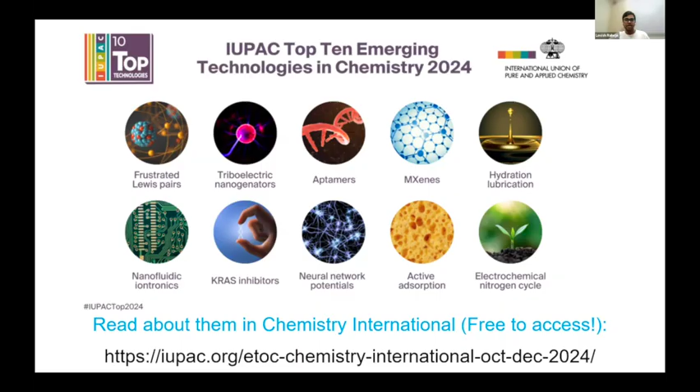Now coming to Professor Subramaniam. So since we are going to hear him, let's have a brief introduction about him. So he is a professor of chemistry at IIT Bombay. His research spans photon-phonon energy conversion, solar thermal materials, electrochemical energy storage, wearable sensors, and operando methods for probing electrified interfaces. Earlier, he has worked on carbon nanotubes during his PhD and developed nanocomposites for semiconductor application at AIST, Japan. He also founded a startup focused on solar thermal coatings.

He has received several honors, including the IUMRS Young Scientist Award in Gold Medal, the Iijima Award, Japan, and the DST-SwarnaJayanti Fellowship, and IIT Bombay's Excellence in Teaching and Impactful Research Awards. He is author of 75 plus peer-reviewed papers and 20 patents. He also served on the early career board of ACS Sustainable Chemistry and Engineering and as associate editor of the Bulletin of Materials Science. There is a lot to talk about him, but since we have limited time, I'll directly hand over to Professor Subramaniam to take it further. We welcome you, sir.

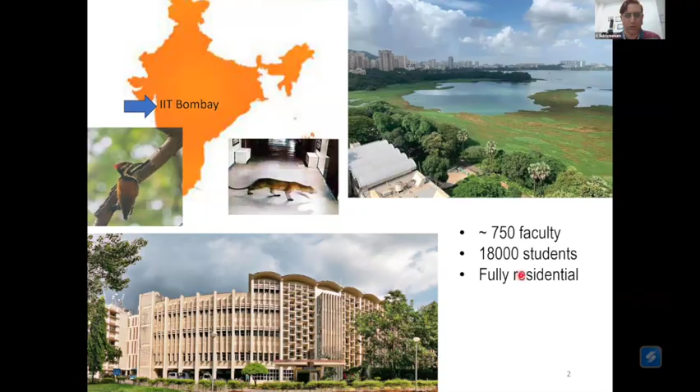So in this direction, if you look at water and ask this question: do we understand what water is apart from its chemical formula of H2O? Do we really understand water? If you ask this very critical question from a scientific perspective, the answer, I'm afraid, is no. Water has been consistently throwing a lot of surprises at us. The more we research into water, the more surprises unfold.

For example, this is a beautiful review which came out in 2006, which talks about the density or the structure of water, especially at interfaces. And you see that the density of water, which is on the y-axis, need not be 1 gram per centimeter cube, as our textbooks regularly say.

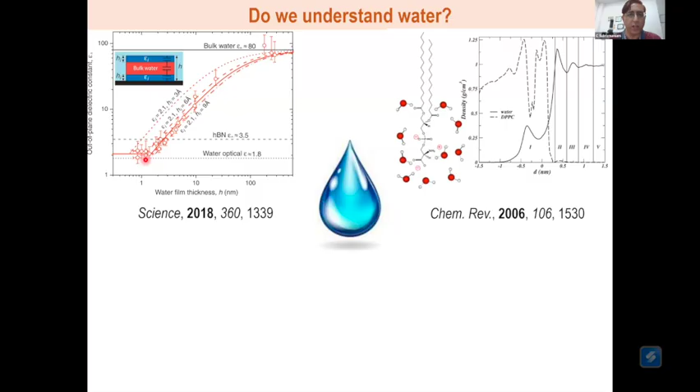And again, something in Nature which came out as recently as 2021 started looking at water as a metal, water which has a huge number of electrons being pushed into it. A very, very counterintuitive experiment where you can just write the reaction of sodium plus water giving sodium hydroxide. They did the same experiment, but then started looking at metallic states of water.

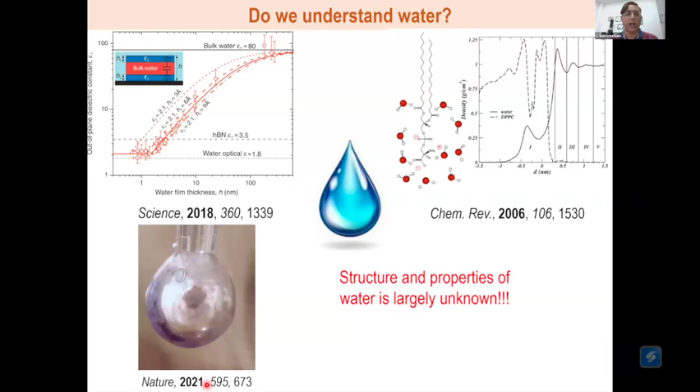So if you really go into the real interfacial properties of water, what I want to impress upon the audience is that the structure and properties are largely unknown, and a lot of surprises wait for us in this domain.

So now, with that as a background, if you look at the contaminants of water, of course, there is an innumerable number of contaminants because of all these properties. You can basically think of anything and everything, and a given set of water will have that. These are some of the few contaminants. So again, a very constricted and illustrative list.

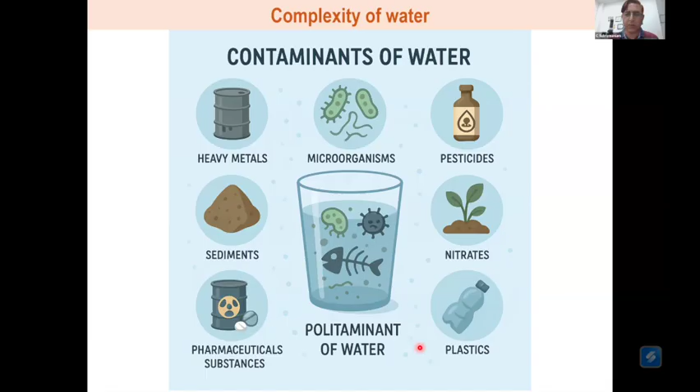But what really is coming out from this is, if you want to purify water or clean water, the problem is so very complex that it cannot be done by chemists or physicists or biologists alone. In fact, what we want is science as a whole and technology as a whole to come together to get this pure water. And that is what we are trying to lean towards in the rest of my talk.

So, a little more about water: the total volume of water on Earth is about 10 power 21 liters. This is fixed. So every single water molecule that you find on Earth is coming out from this 10 power 21 liters. And the freshwater availability out of this is extremely low, about 4%. So we need to really think of pure ways of purifying water.

And how does nature deal with this? Nature has its own beautiful hydrological cycle, or the water cycle, which is basically an evaporation process followed by condensation and precipitation, which kind of recharges. And this is how the water cycle or the hydrological cycle evolves.

But here, the interesting aspect is evaporation is an energy demanding process. That means if you want to take liquid water and make water vapor out of it, you need to supply energy, which is roughly about 2250 joules per gram of water.

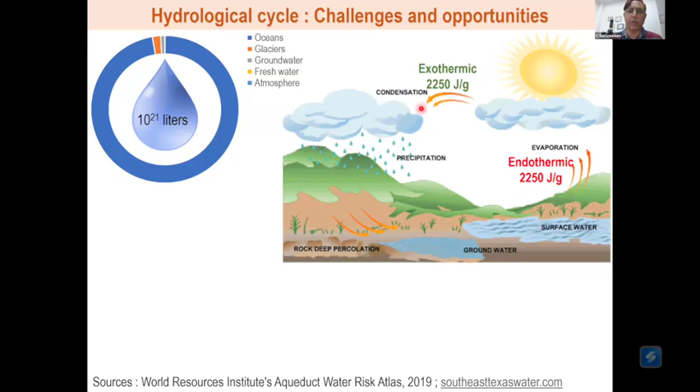And the same energy that is supplied to the water body during its endothermic evaporation is actually released back when it is forming clouds and precipitating down as continuous rain. And this is how the energy balance along with the mass balance is treated in nature.

But if you look at the Earth as a huge living lab, and try to see the rate at which water forms clouds and reprecipitates as rain, it's about 1 liter for every meter square area of the Earth in 1 hour. That's the amount of water that is evaporated and then falling down at some point of Earth at any given time. So somewhere on Earth there is rain at any given point of time, and this is basically the rate at which the water evaporates and falls down.

And the important thing about this entire beautiful hydrological cycle, which has been operating for as long as the Earth, is that the evaporation of water leads to water vapor in its purest form.

This leads to water vapor generation, which is the purest form of water. Irrespective of the source of water, even the dirtiest form of water you can think of, once water evaporates as water vapor by absorbing that 2250 joules per gram, this is the purest form of water.

Therefore, the only limitation to this entire naturally happening, ubiquitous hydrological cycle is that the kinetics is extremely slow. Nobody wants to wait for 1 hour to get 1 liter of water, or in the course of a day, 24 hours when the sun shines, you probably end up with 5 to 7 liters of water, and that's too small for the kind of population the Earth has right now. So the kinetics of the hydrological cycle is really slow and climate dependent. So these are things which we want to take up as a material science challenge.

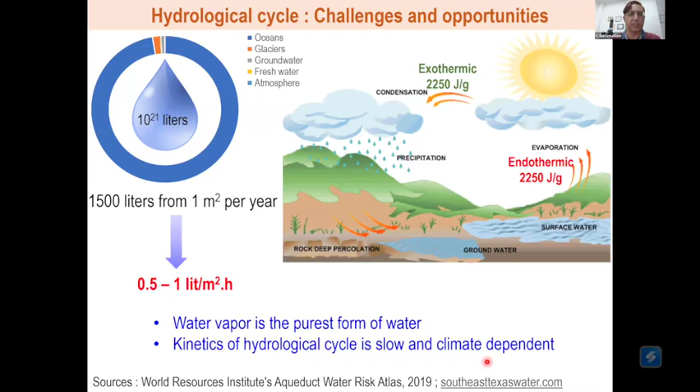We've kind of mimicked the natural hydrological cycle in these devices which are called solar stills, where you take dirty water and use purely solar energy. The heat from the sun evaporates the water, it condenses back on the backside of this glass surface, and then you can collect the condensate water, which is of almost similar purity to deionized water, because it's going to contain extremely low ionic salts or any other kind of impurities. This has been with us for almost 6 to 7 decades.

But the problem is, if you look at it from a wholesome picture, the light admitting surface, which is the glass surface on the top, is exactly the same surface on which the water vapor condenses. Sunlight penetrates the top surface and ends up heating the water. Once the water evaporates and forms water vapor, condensation starts to happen on the same surface. This means it is a self-limiting process, because once you start forming water drops, you attenuate the light intensity going down, and therefore the heating and water vapor production naturally decrease. So this is a kind of vicious cycle, a self-limiting process.

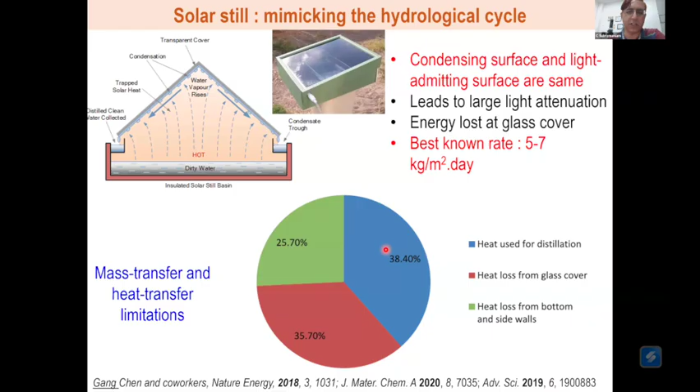These devices won't do any better than nature, which is about 5 to 7 kilograms per meter square per day, about 5 to 7 liters of pure water as condensate. And like I told you, condensation is an exothermic process. It releases heat, which adds to the efficiency loss. In fact, if you do an energy balance, the heat used for distillation, which is water vapor evaporation and condensation, is just about 38 or 40% of the total energy available from the sun. So this is really the crux of the problem: greater energy efficiency is required to bring about higher throughputs of clean water from solar stills.

So this is the problem that we started with, and said, okay, what do we do? If you look at the solar spectrum, it starts from 250 nanometers and goes all the way up to 2500 nanometers. This is the entire spectrum of light that the sun throws at Earth. Solar panels or any kind of photo-driven process try to utilize part of the ultraviolet region and a large part of the visible region. They actually have preventive mechanisms in place to avoid the infrared radiation, which contributes heat, especially in a country like India. You step out in the sun, it's extremely hot. So infrared radiation is never a part of these technologies, which was very surprising to us.

And we said, can we capture and utilize the entire range of the solar spectrum instead of being partial to the ultraviolet and visible part? Can we include the infrared radiation and utilize that as well, because this part of the radiation contains 50% of the solar energy. So by restricting ourselves to the ultraviolet and visible region, we are only working at 50% efficiency straight away by neglecting the infrared component. So for that, we needed materials. So what is the material?

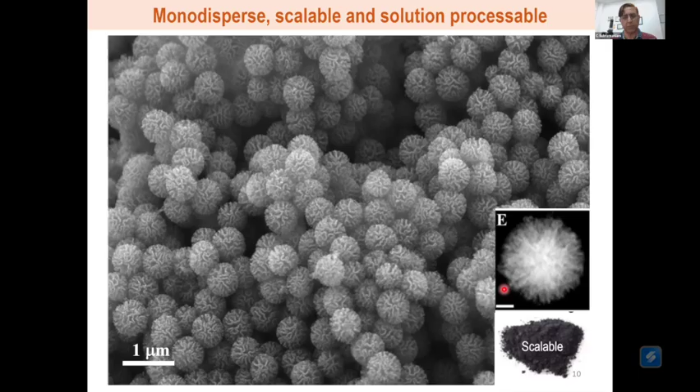So what do we do with this? When we make it, we get it in the form of a solid powder, which we then process into a dispersion or a paint. This gives us the versatility to coat it on a lot of different substrates. For example, you can coat it on the wall of a building like a terracotta or a cement structure. You can coat it on metals like copper and aluminum. You can even coat it on filter paper.

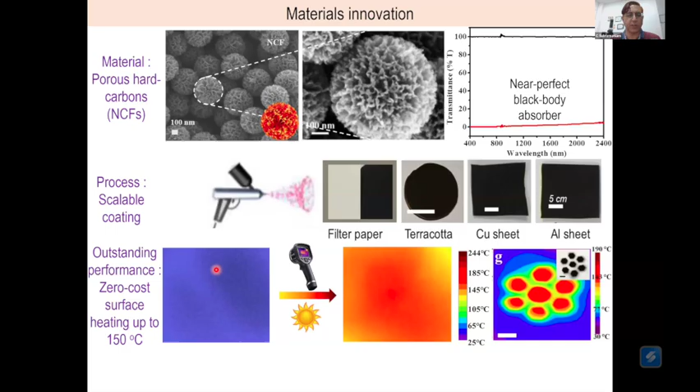The next question is, what happens to this energy? Because when it absorbs photons, it absorbs the energy from the light photons. So for that, we looked at thermometric imaging to measure the surface temperature. For example, this is the surface put in the dark. The minute we put it in sunlight, you see that the surface temperature shoots up, as shown in this red image, and it reaches almost up to 150 degrees.

This is just clean green heat that we are generating on the surface just by putting the coating in sunlight. The material absorbs the sunlight and converts it to heat. So there is this photon to phonon conversion, and the phonon gets manifested as heat energy at the surface of this coating.

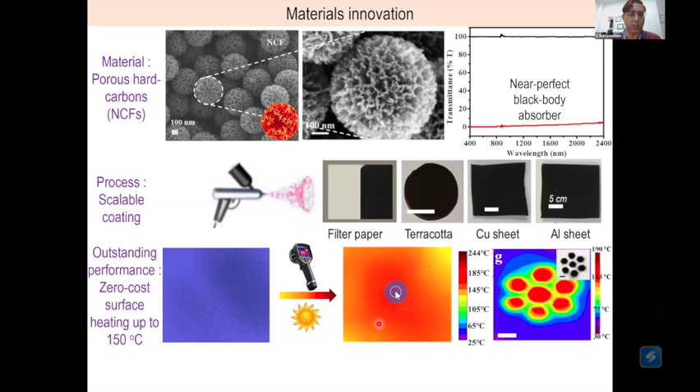And again, we wanted to understand a little bit about why the temperature that we are reaching is significantly higher than other materials. So we wanted to understand that. So we have done a variety of fundamental characterizations. Say, for example, this is the SEM cross section of this material.

So imagine these are three-dimensional spheres, nanospheres, and you break them open like you crack the sphere, and that allows you to see what is inside the sphere. And this cross section actually resembles very closely a Japanese kind of origami fan, which basically has a broad mouth or opening on the surface, and that is continuous and extends all the way to the center of this material in the form of a continuously graded pore structure.

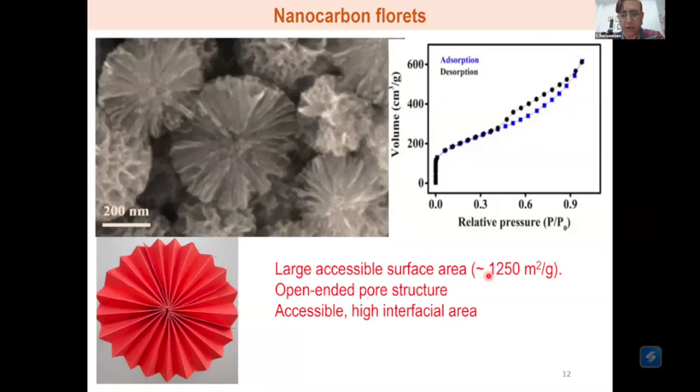So if you can kind of imagine the structure, you take a cone and then assemble this cone one against each other in a 360-degree fashion, you get this entire structure, the three-dimensional structure, isotropic structure. And that is manifested as a very high surface area of this material, about 1,200 meters square, but more importantly, this is what helps in its large absorption.

And now if you try to put a photon in any direction inside a cone, it is only going to get internally consumed, through something like a multiple internal reflection channel. It is going to get internally reflected and consumed and not come out. That means hardly any dissipation happens. The photon energy is completely thermalized and internally consumed by this material.

And that is what gives us an alpha, which is the absorptivity, very close to 1, whereas the emissivity, because of this cavity geometry, is around 0.3 to 0.4, which is actually violating Kirchhoff's law of thermal radiation. And you know that these kinds of violations are very well known in literature, because cavities are one of the best absorbers and one of the poor emitters.

But when it comes to applications, this low emissivity is actually important, because low emissivity at a larger, macroscopic scale means that the radiative loss from this material is low. When something heats up, it always radiates and gives out its energy. This is coming all the way from Planck's law of thermal radiation.

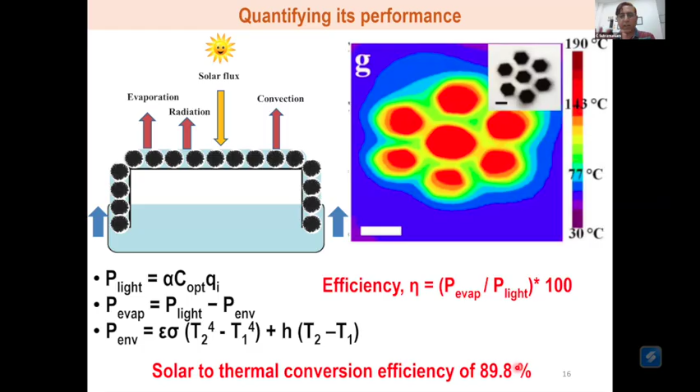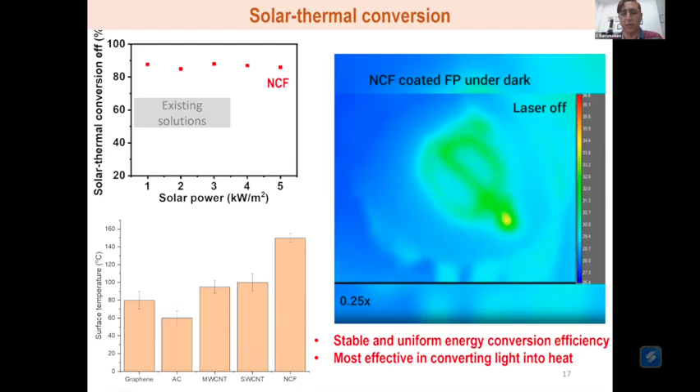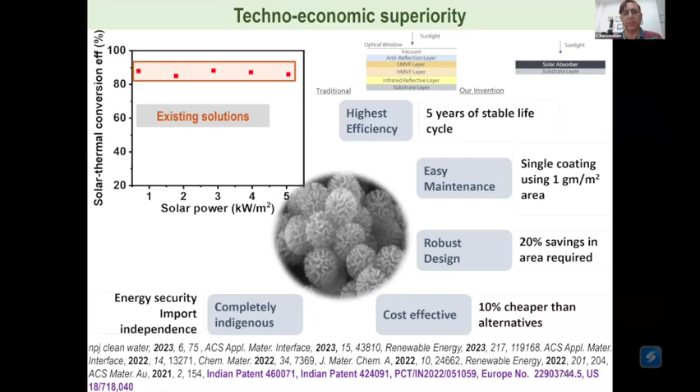We have done a lot of other tests. I'm not going into the details of this, but because it's a carbon material, it is going to give you a lot of stability of function. And especially when you look at solar to thermal energy conversion, this is going to be one of the best materials. So now, with that as the background, in the last probably 5-10 minutes I'll try to impress upon you the applications, the products and technologies that we have been able to develop. That was the science part of it.

Now, when you look at carbon dioxide emission, I know this is an important aspect of sustainability, global warming, and everybody is now bothered about the concentration of CO2 in the atmosphere. But a very interesting and shocking statistic that we came across was 45% of the global CO2 emissions actually comes from heating air and water. These are just two ubiquitous things that are everywhere around us. You start heating them, you emit carbon dioxide in the process, because most of the heating sources that we have are non-renewable sources, which means that you end up putting out CO2 at the same time that you're generating heat. This is accounting for 36 gigatons of CO2 emissions from heating alone.

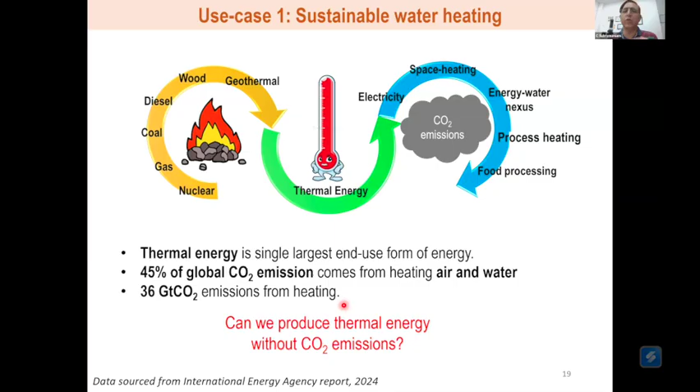So now we thought that in this context, the heating that we are generating purely by solar thermal using our NCF material is something which is going to be extremely useful and relevant, because it comes with zero CO2 emissions. There is no CO2 emission, but at the same time, you produce heat on the surface. And now any heat on the surface becomes an engineering problem: how do you take that heat and put it to use, or put it to do a job for you?

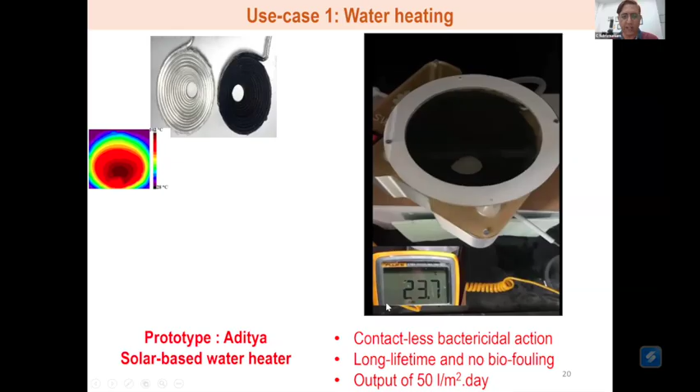And so the first example that we did was take these hollow aluminum tubes, bend them around in a spiral fashion, and coat the outside of this. The idea is that these are hollow aluminum tubes, so you can flow water through the inside of these tubes, put this in sunlight, and this heat generated by the coating is now able to transfer through aluminum, because aluminum is a good thermal conductor, and we should be able to heat water through that. And that is exactly what this video shows you.

And now we developed a prototype. If you see, we are measuring the temperature of water at the outlet, and you can see that the temperature reaches close to 80 degrees. In fact, we are able to cross 80 degrees. This is water heating with no other energy but sunlight.

And because we are able to cross 80, something interesting opened up: a device like this, which is hardly 1 foot by 1 foot and weighs about half a kg, can give you an output of 50 liters of water per day. And basically, this is again zero cost heating. And if it crosses 80 degrees, that means we can get rid of biological material. We can get rid of pathogens.

Most of the pathogens are unstable at this temperature. So we ended up doing some experiments where we take some known concentration of pathogens and try to see what happens when the water comes out. We see that all the pathogens, even if we start at about 10 power 6 CFU per ml concentration, we end up getting almost next to nothing in the output water.

So this is again something which can give you a clean and green method, without adding any CO2 to the atmosphere, without contributing any CO2 emissions. You can get water heated and purify water, at least get rid of the pathogens. And like I said, this is one of the lowest CO2 footprints for heating water itself. But this is one of the things.

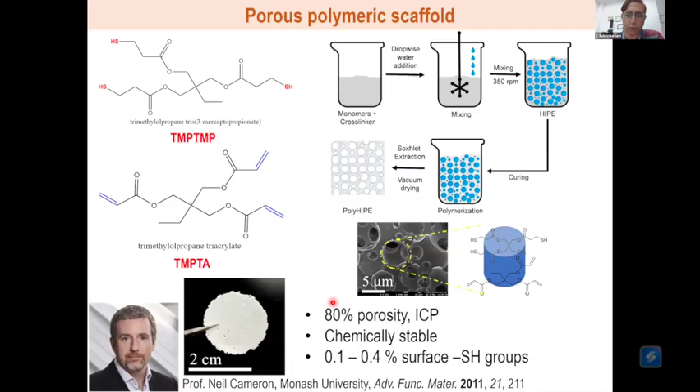Of course, I should here definitely acknowledge the contributions from Professor Neil Cameron in Monash, who's been a wonderful collaborator. He was the one who made this polymeric membrane, or porous polymer scaffold. And we took this scaffold. What was interesting is it's a porous structure, and we coated one surface of this material with NCF, that is the black material, our proprietary material.

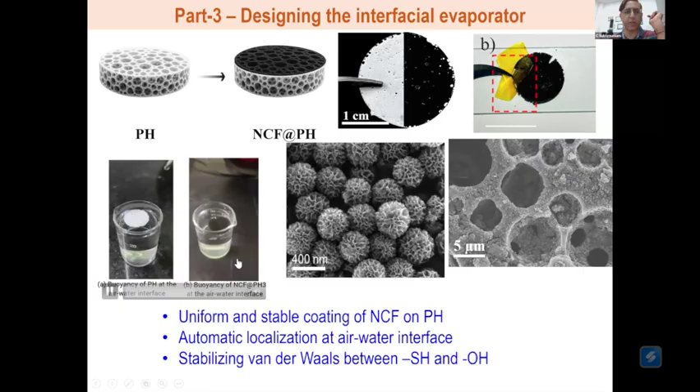And the interesting thing about this is, if you take this material and dunk it into a body of water, it self floats. It's so light and porous that it can actually float even if you push it down inside the bulk of water. And this gave us an opportunity for interfacial evaporation. So you take this material, it naturally suspends itself at the air-water interface. This is the interface where the sunlight reaches the coating.

Water reaches it from the bottom, and you can see these droplets of water, which are now dye-coded, evaporating from the surface, because it is now able to pick up the heat from the NCF coating and form water vapor. Of course, to see it better for a visual effect, we have added some dye molecules. That's why you see these water vapor droplets as green in color. We have just added some rhodamine dye to it.

And so we went on. Pure water in lab scale is interesting, but when you talk about direct applications, salinity or dissolved salts is one of the most important and difficult to remove contaminants of water. And when we evaporate water, with 90% efficiency in the solar thermal conversion, we could reach about 6 to 6.5 liters per meter square per hour. When you benchmark it, the conventional solar still is just doing 1 liter per meter square per hour. So we are already doing about 5 to 6 times higher than a conventional market-ready solar still.

But we have done a lot of different tests to prove that the salinity is actually rejected. What happens is, water vapor evaporates and the salt is all left behind. But because the salt is left behind on a well-defined membrane, we can take the membrane, clean it, and put it back for use. So every day you take the membrane out, clean it, and put it back, you are good to go. And this can be done in the evening when the sunlight is not available.

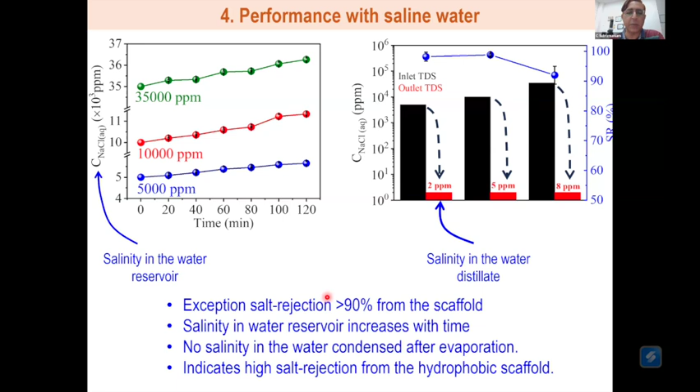We can get as high as 90% salt rejection from this interfacial coating, which we have also established through detailed COMSOL simulations, where we see that the heat is restricted only to this interface and not into the bulk water. So we are selectively heating the water at the tri-interface where light meets NCF meets water. This combination of light, NCF, and water is very powerful, because light is able to interact with NCF.

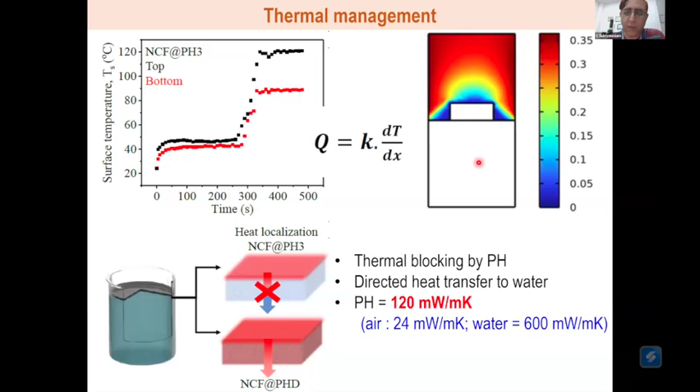Provide the required temperature, and that temperature is instantaneously delivered to the water for it to evaporate. Now, evaporation, like I said, is only half the story. I'll just quickly go through this. So what can we do to really take that water vapor and recondense it back? That is where we get pure water at the end of the day.

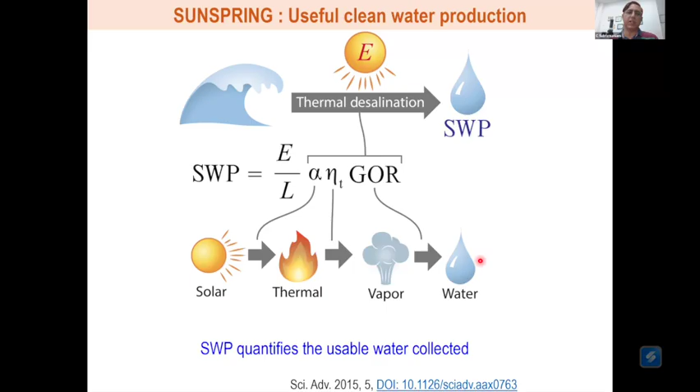And this is entirely captured in this beautiful paper in 2015, which describes solar water productivity, which takes into account how much of sunlight is available, how much of it is converted to thermal energy, which then goes on to produce vapor from liquid water, and then not only stops there, but also takes into account how much of the water vapor thus produced can be recondensed back to liquid water. So this entire cycle is what is accounted for in the solar water productivity cycle.

By doing this design, what we have actually done is decoupled the heating part and the water condensation part. Remember, this was the limitation in conventional solar stills: the same surface is the light absorbing or heat generating part and the condensation part. We decoupled it because we want to go higher in energy efficiency. And now we work with a mechanical engineering heat transfer problem. So how do you transfer the heat generated on this surface to the water? Once you do that effectively, the water starts evaporating and condensing.

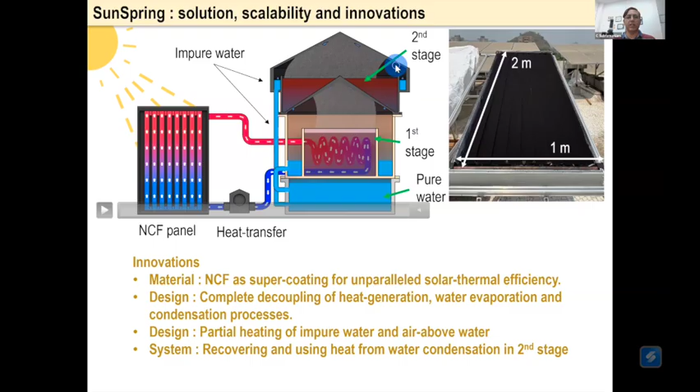Not only that, condensation is an exothermic process, so we can use that heat to heat more water, and that builds the second stage. Now you have condensation happening not only from the first stage, but also from the second stage. So your cumulative water collected is going to increase drastically. And what did we see? The clean water output in field experiments is about 30 to 35 liters in a day, which is significantly higher than what a conventional solar still would do.

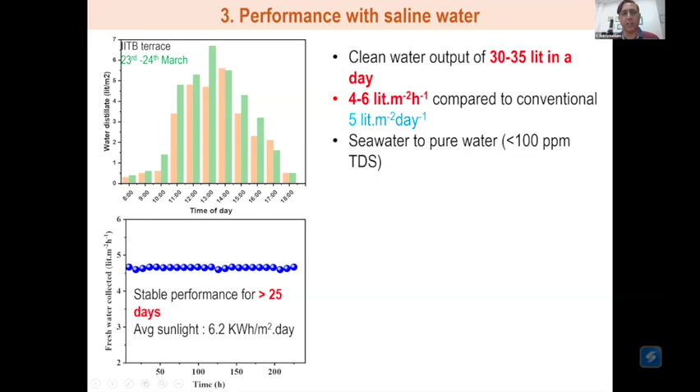And we have now worked on the engineering design so that we can even go from seawater to pure water which is less than 100 ppm. And we are re-emphasizing that we have the lowest energy and therefore the lowest CO2 footprint for the entire process. So this is basically the summary. We can now generate clean water. And the best part is, because it's completely dependent on solar, we are not tapping into any other forms of energy, like electrical. We're operating purely on solar, and that's free energy. Therefore, our energy footprint is very low. Consequently, our carbon footprint is very low.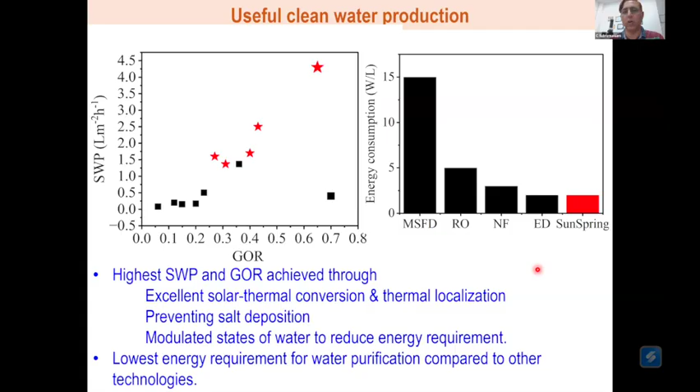So right now we are in the process of setting up a 300 liter per day completely solar thermal water distillation unit in this Kutch area of Gujarat. On a pilot scale, we are testing it on about 100 school children who are going to benefit from this 300 liters production per day. And this, we think, is going to make a small change not only in the living conditions, but also in the health of our future generations. And remember, all this is being done in a very sustainable way, because we are not using any other source of energy which is polluting.

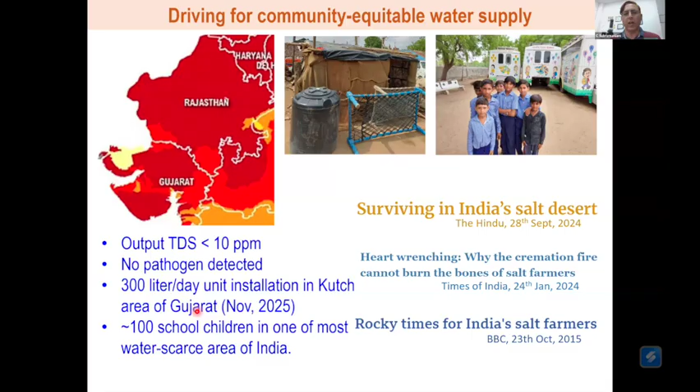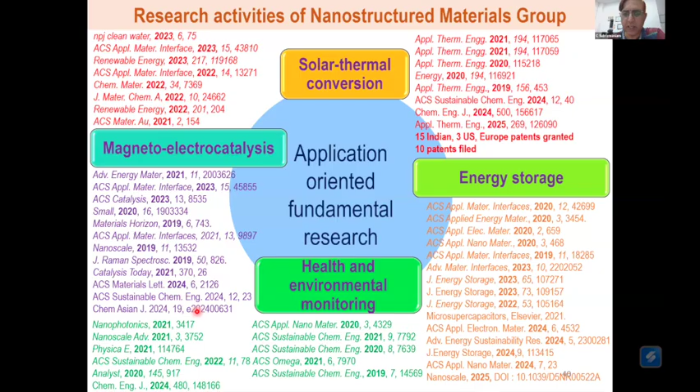...any other polluting form of energy. So with that, basically, this is one of the things that my research group does at IIT Bombay. We also work on energy storage, environmental monitoring is something which we are very passionate about, and other forms of green hydrogen and so on and so forth. So we are working largely in energy and interfacial science. That's what we do. You're free to write to me.

This is my group. All along I've been presenting as if I did the work. The work is completely done by my wonderful team and my students. As you see, I'm right at the background. These are the people who have been running the lab and doing the work, and I've been just sharing the data with you. Thank you very much for your patient listening.

I should be thanking my funding agencies, and NCF Labs is the startup that we are working on, particularly in the solar thermal domain.

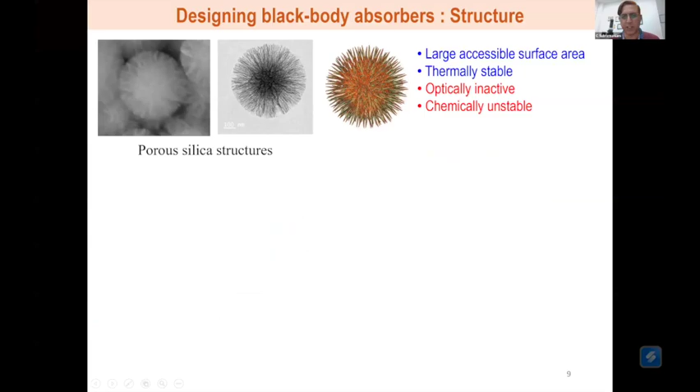The first question is about making the carbon, the NCF itself. The source of carbon is basically acetylene. We use acetylene, send it through a furnace at about 600, 700 degrees centigrade. The acetylene breaks down. We are not sure whether it's a homolytic or heterolytic cleavage, but at the end of the day, it ends up producing carbon precursors, which then deposit all along these fibrous silica structures.

The best part about CVD is that you can control the conditions like flow rate, temperature, the amount of gas that you pass. By controlling that, you can control the thickness and the uniformity of deposition, and that is what we have optimized. Once the entire surface of SiO2 is coated with carbon, all you need to do is take it out and put it in sodium hydroxide. It will react with the silica and etch out all the silica, forming water soluble sodium silicates. What is left behind is an integral carbon structure.

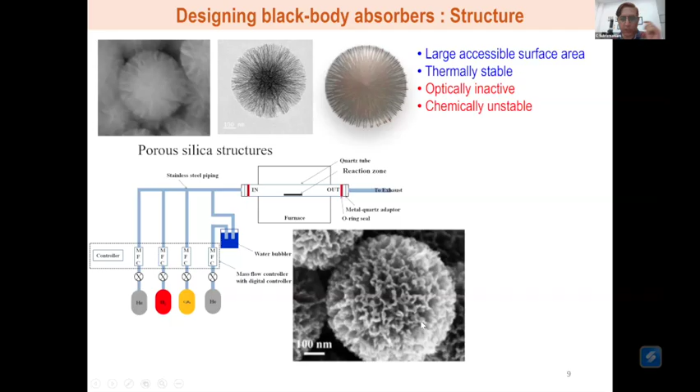The second question is about the hard carbon structure. Hard carbon is interesting because, as the popular saying goes, diamonds are forever. But if you ask any scientist, diamonds are not forever. Diamonds are the metastable form of carbon. Every single form of carbon will over time collapse into the thermodynamically stable form of graphite, which is the carbon found everywhere on Earth, because graphite is the thermodynamically most stable form of carbon.

For example, you take carbon nanotubes, graphene, carbon onions, Buckminster fullerenes, any form of diamond, nanodiamonds, any carbon allotrope, you heat it up, it will collapse to graphite. Now, there are also certain forms of carbon which resist such graphitization, and those are called hard carbons. It has nothing to do with the mechanical property; it has to do with the thermal stability.

As this cartoon shows you, at the short range they will behave as graphite. That is, they are well-ordered graphene layers sitting one on top of each other, interacting through van der Waals interactions. But when you go to the long range, this order collapses. So it's neither a completely amorphous material nor a completely crystalline material. It's a mixture of short-range ordered domains, which give it a certain amount of crystallinity, and which then break down over the long range, giving it a certain amount of amorphosity.

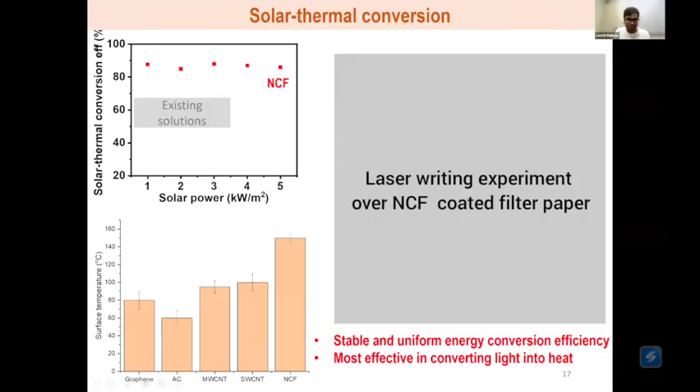Another part is about the environmental impact, since at the end of the day we are targeting sustainable development goals. So do we have the numbers about CO2 emissions, and how is it comparable to others in terms of energy efficiency? Yes, of course. Let me just go to the slide. Probably I streamed through it. So this is where we look at energy consumption.

For example, we have multi-stage flash distillation, reverse osmosis, nanofiltration, electrodialysis. All of these are prominent and scalable commercial technologies for water purification. But if you look at the energy consumption, given in watt per liter, we are talking about anywhere between 2 to 15 watt per liter, whereas ours is one of the lowest in terms of energy consumption.

The other thing that I want to point out is that all these techniques given in black constantly require electrical energy to be fed into them for the process of water purification. Here, it's all dependent on solar, and that is why we have one of the lowest carbon footprints and energy footprints.

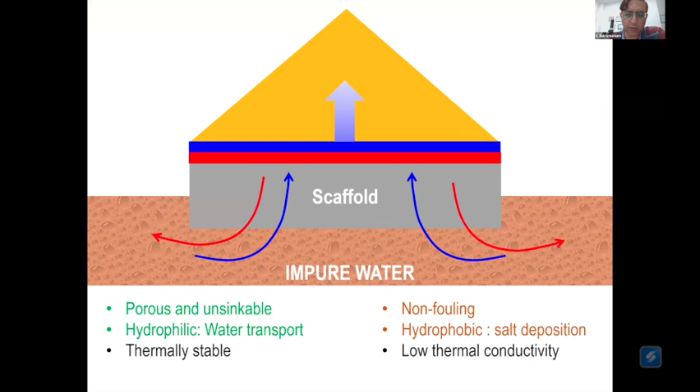Also, this is a one-time penalty. This is still a one-time penalty. It is not a continuous penalty as compared to all the other techniques. That means you have to continuously use a boiler. You have to feed in fuel continuously. Whereas here, this carbon footprint comes purely from the making of the material. Once the material is made, it's largely a minimalistic CO2 footprint, because most of the energy is taken from the sunlight.